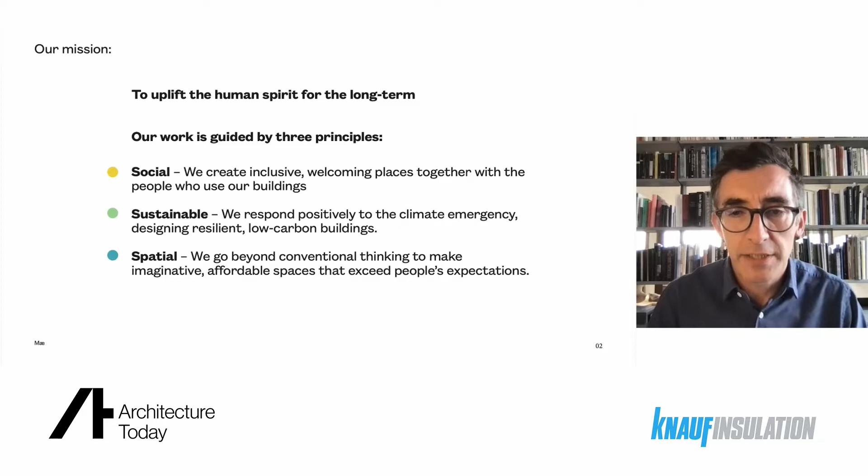Our priority increasingly is to respond positively to the climate emergency by designing resilient and low carbon buildings, and that's both embodied and operational carbon. And then we try and go beyond convention, particularly spatially. So for us, in answering the question about creating homes where people want to live, it's very much about creating spatial delight and places that are enjoyable and welcoming.

But I want to talk specifically today about the climate challenge and the fact that we need to ensure that all new buildings are operating at net zero by the year 2030. And so I want to start with our reflections on how we can do that simply in housing. A lot of you will probably be familiar with passive house design, but for us on Agar Grove, it was relatively new. And it's relatively simple, but the execution is hard. So passive house relies on some simple moves.

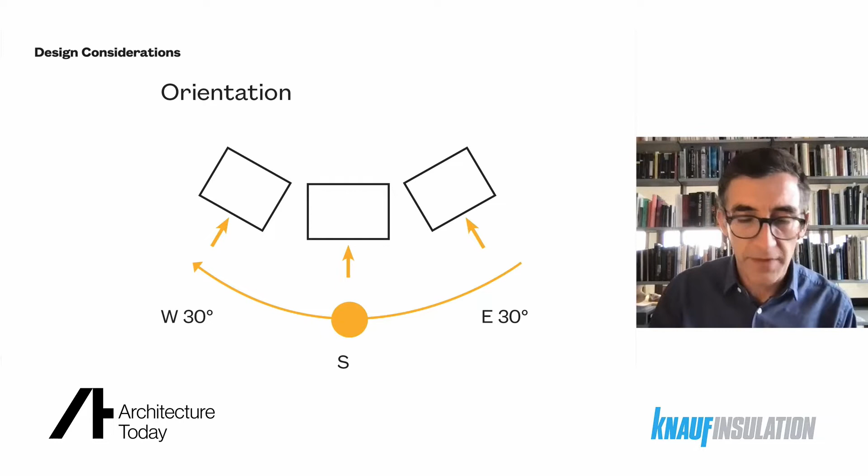The first one is about orientating the buildings so that they warm up naturally from the sun. So your ideal orientation is towards the south, which I'll come on to, is quite hard to achieve in urban settings. And I think one of the challenges today, if we're going to build sustainably, we want to be building in urban conditions, in cities, intensifying cities, where you want to build at a suitable density, and arguably simple south-facing orientation doesn't necessarily lend itself to good urban design. So we'll talk about some of that, the challenges of dealing with that.

The second aspect of designing to passive house is ensuring that there's good solar gain into the home, so it naturally warms up, but importantly has suitable shading and suitable sized windows so that they don't overheat, but also that windows are appropriately proportioned so that you're not reliant on artificial light during the day. And we've again learnt through the Agar Grove project what's working and what's not, and certainly lessons for the future.

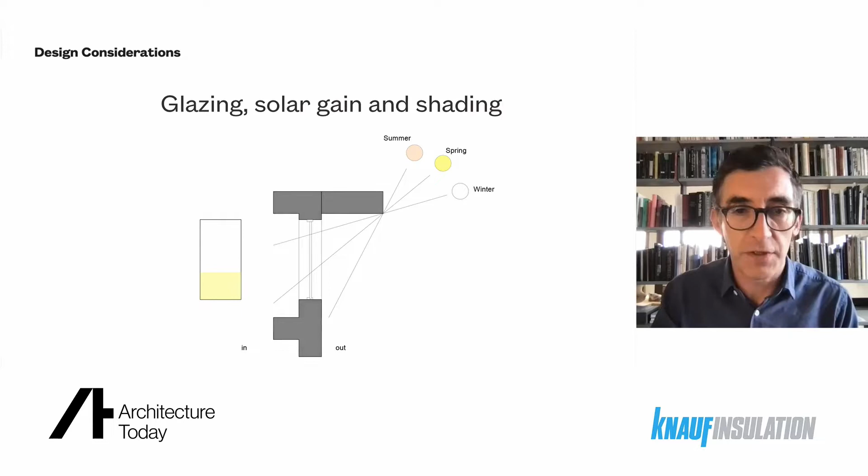Simple and effective form factor helps reduce the heat loss, and more complex building envelopes tend to be less efficient in terms of their form factor and therefore increase heat loss. So how do you create beautiful but relatively simple forms without dumbing down to simple boxes?

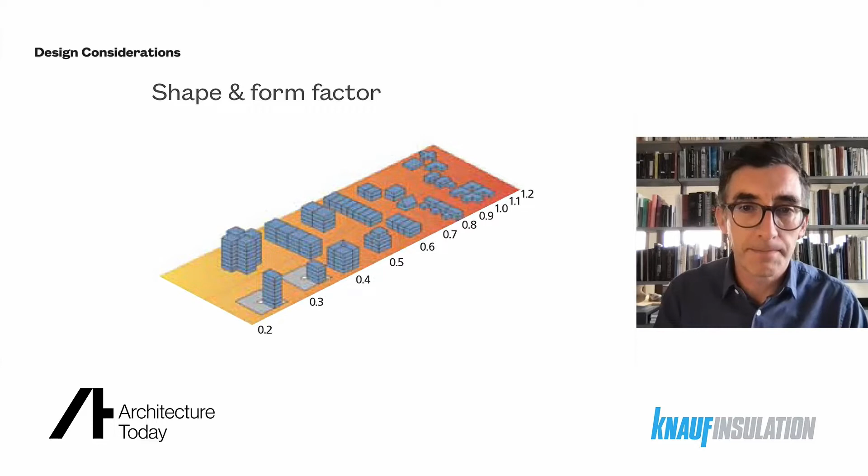And then the core element of passive house is about airtightness and really ensuring that you're not leaking heat through drafts and poor construction. And that overwhelmingly is often where buildings perform badly, the permeable construction or their leaky construction. So even things down to how you design in letterboxes, or rather don't, and manage that so that there's not leaking through letterboxes or cat flaps.

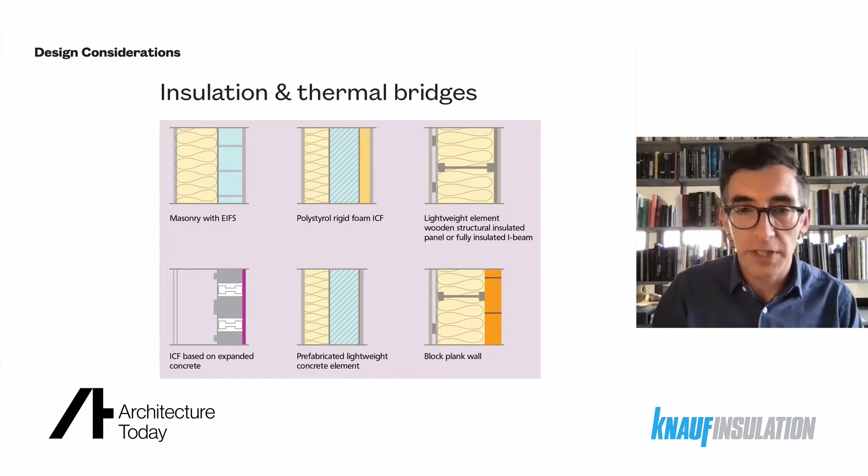But it's about ensuring that buildings are well built, so really keeping a close eye on form of construction and ensuring that there's a very high level of insulation, so super insulation as a way of minimizing heat loss and improving the warmth of the home.

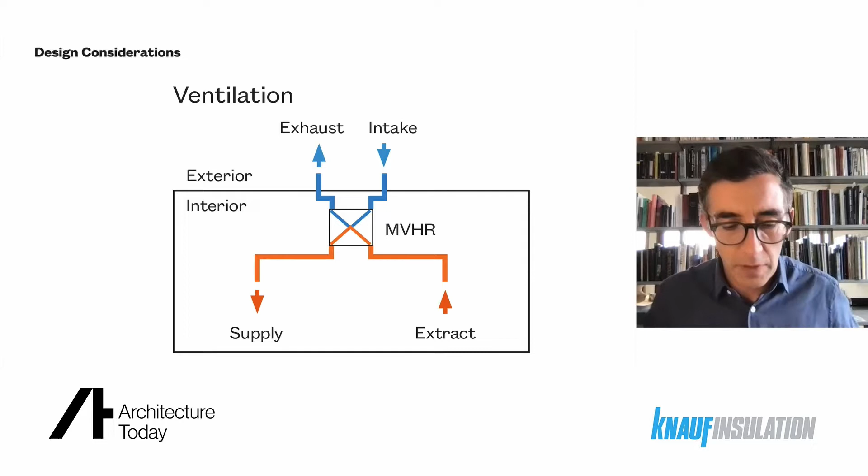And then the complementary element of passive house design is to ensure that there's sufficient air for health and well-being. And we do this through mechanical ventilation and heat recovery. So the moisture from your damp air from kitchens and bathrooms is extracted and emitted, but the actual warmth from the heat can be put back into the home, so it's not wasted, and ensuring that there's sufficient ventilation. And it's important to note that whilst airtightness is important, passive house isn't about hermetically sealed homes. You can open windows for natural ventilation, but ideally in winter you don't need to.

Now, the RIBA have set out very clearly a challenge for us all as architects and those in the built environment to reduce operational and embodied carbon. And through the passive house, I'm really just focusing on the operational element. For a typical home today built to standard building regulations, the operational energy needed is about 120 kilowatt hours per meter squared. And the RIBA's 2030 target, in order to meet our carbon reduction targets, is 35 kilowatt hours per meter squared. And passive house, for example, at Agar Grove, what we've achieved there is 15 kilowatt hours per meter squared. So way beyond the 2030 climate challenge target.

And I think it's perhaps, given my time, for others in another session to talk specifically about embodied carbon, which I haven't got time to go into, but I'm going to focus on the passive house element of operational energy in Agar Grove.

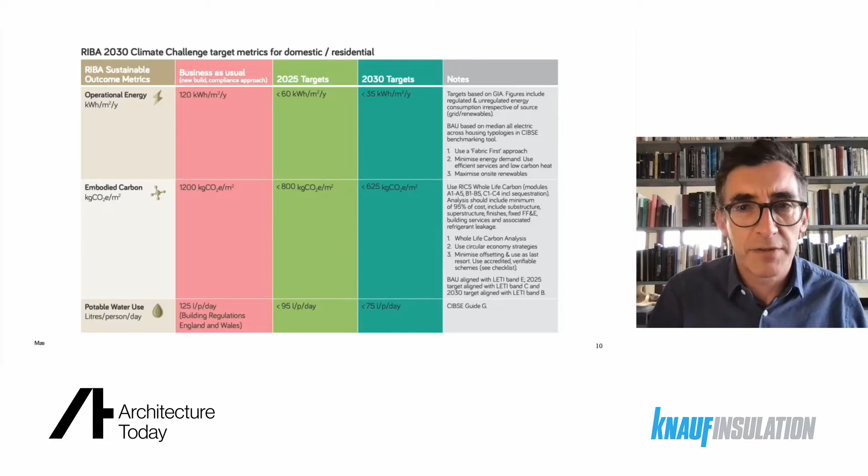So Agar Grove was a collaborative scheme developed with Hawkins Brown Architects as co-master planners, along with Grant Associates, and then with Arcadis as project managers and QSs, Stantec, Max Fordham's bringing real specialist expertise in terms of services and sustainability. And then we worked with Warm as Passive House certifier, and also Hill, the contractor, brought in Archetype for their specialist passive house knowledge as delivery architects.

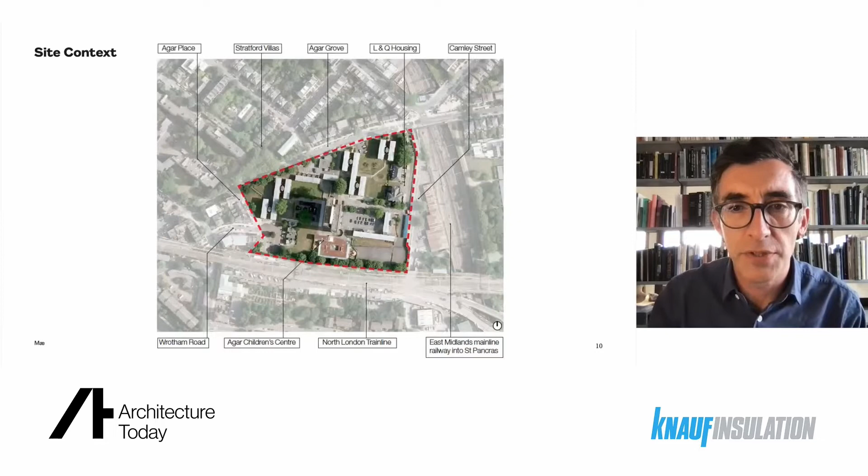And it's a classic 1960s estate, and you can see the grain of these buildings here doesn't respond in any way to the urban context. There's the Victorian and Georgian context to the north, which is much more about streets and squares, and the classic 60s estate turned its back on that character, and the buildings were substandard. They were low quality construction. They were undersized in terms of meeting decent space standards, and it was deemed through an engagement process that residents sought new homes rather than refurbishment.

And you can see from David Grandorge's beautiful photos here what the estate looked like. The low-rise buildings had no relationship to the outdoor spaces, so no active frontages onto the street. And again, the tower meets the ground very poorly in terms of its urban design. However, we are looking to retain the tower, so that will be stripped back to its frame, keeping the embodied carbon that's already in that building, and it'll be extended and reclad as new housing.

And early days, we looked to kind of balance that consideration of part retention and refurbishment and part demolition. But you see from the context to the north on Agar Grove that you've got wonderful Victorian villas, and on the left the estate very much turns its back to the street and has no sort of connection

to the urban realm. So our master plan, this is where it's a sort of challenge meeting Passive House, because you can see it's not just orientated east-west in order to optimize solar gain. We've got streets running north and south, and the master plan was very much about extending the green spaces on Agar Grove, so improving the public realm.

It was about stitching in and connecting the streets into their context, retaining Lulworth Tower and giving that new meaning by situating it within the new master plan, creating a safe family neighbourhood of streets with continuous frontages, so active frontages and front doors onto the street, and then importantly creating better homes for the residents who are being rehoused. So nobody was displaced off-site, everyone was offered a new home on the estate to better space and environmental standards.

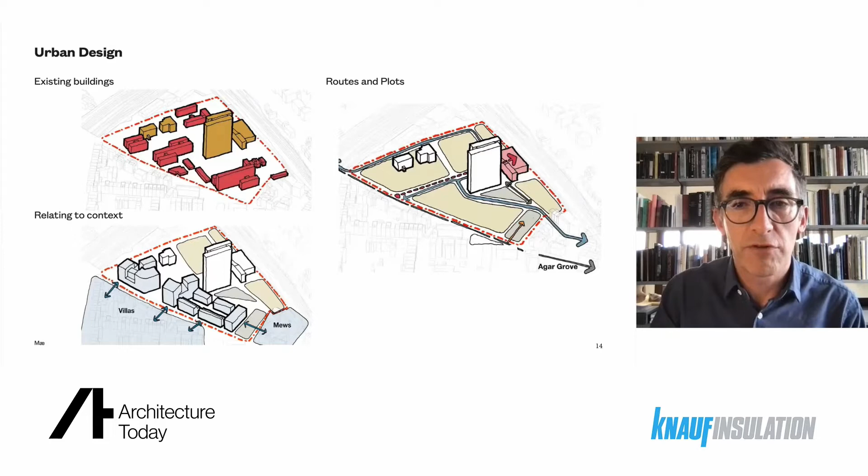And then the scale increases towards the south. So on the north, we've got villas that face onto the existing villas opposite, and then building up height towards the railway where we can deal with the density. So here you get a better overview of the mix of typologies that we're offering. So we've got terraces, villas, and mansion blocks, and then a new tower block at the back that rehouses the residents who are currently in Lulworth Tower. And then Lulworth is the last phase, and that can be refurbished and offered up as market sale once all the existing tenants have been rehoused.

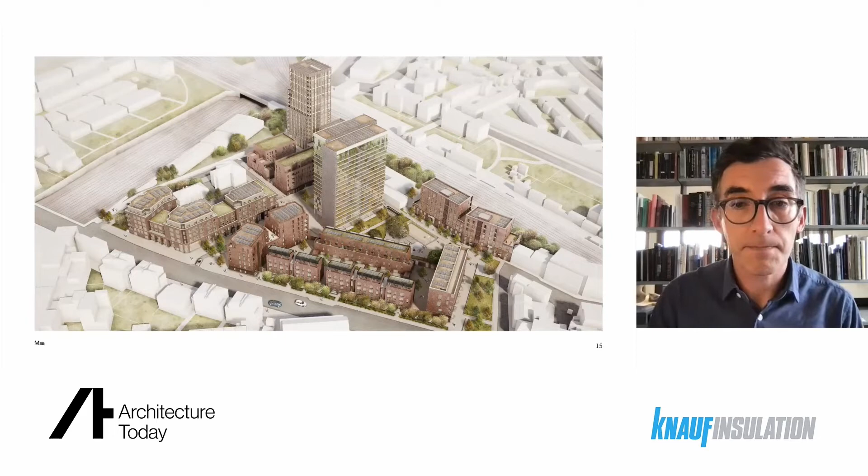And so really what we're trying to do here, and very much responding to the brief for today, is about creating places rather than just housing, is through the variety and the mix of housing on this estate, create a rich mix and a rich place of diversity in terms of diversity of building type, diversity of housing type, and diversity of tenure.

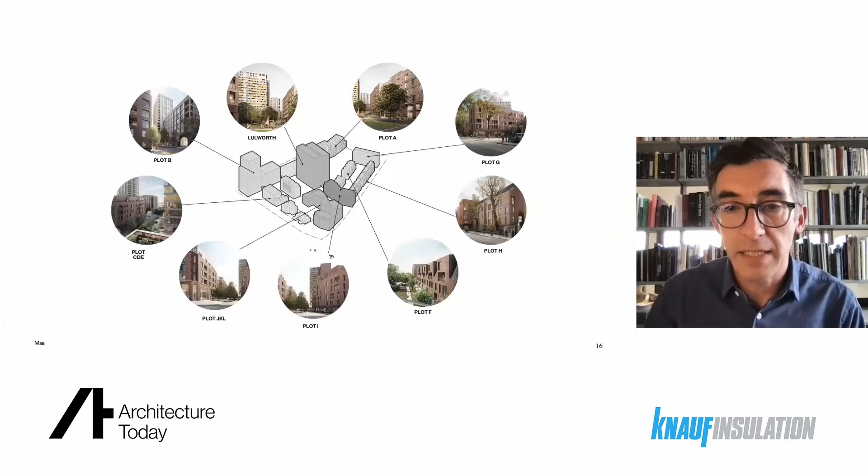So the actual buildings are 50% designed by Hawkins Brown, 50% by May, but dotted throughout the scheme, so we get that variety. But we coordinated with our friends at Hawkins Brown a material palette from the outset, which is a mineral-based material palette of bricks, which are very much part of the urban context, albeit with a variety of colours and textures.

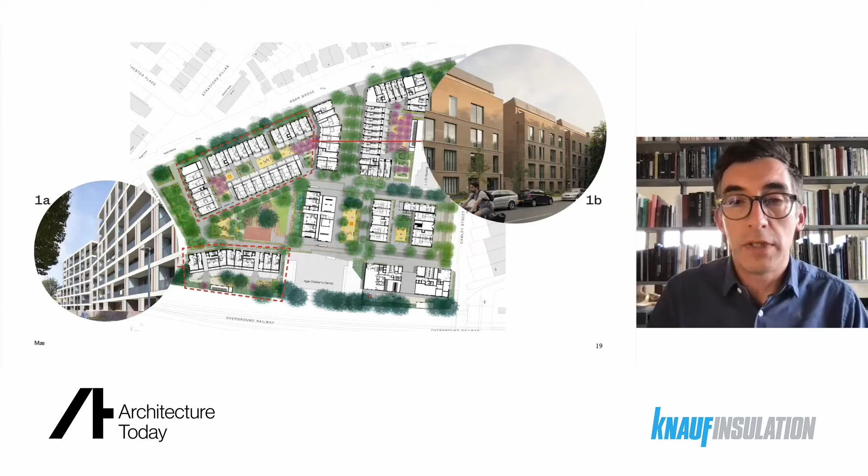So to date, we've completed phase 1, which are the areas dotted in red. Phase 1A was designed by Hawkins Brown, and that was on the one available site. So that was on a car park, and we were able to build that in order to then move the first group of residents into it and do the first phase of demolition. And then that started the cycle of rehousing and redevelopment. So this is Hawkins Brown's building, which comprises 38 social rented homes. And you can see Lulworth Tower in the background.

And just dealing with the Passive House moves, you can see that on the right-hand image, it's very generously glazed with large balconies that help provide overshading of the homes, preventing overheating rather. And then on the north, a less heavily fenestrated elevation with more insulation and more mass to reduce the heat loss. So we've designed to ensure that homes are optimized for dual aspects, so there's good cross ventilation.

And here you can see from this plan from phase 1B, which is our buildings at May, that the buildings are through flats or through maisonettes. So this phase 1B comprises 23 market sale homes on the end here, this building here, which you see on the left, and then additional social rent, which I'll show in the next image, in the 2 terraces off it. And they all share a communal garden on the inside. So all residents have access, regardless of tenure, to that communal garden.

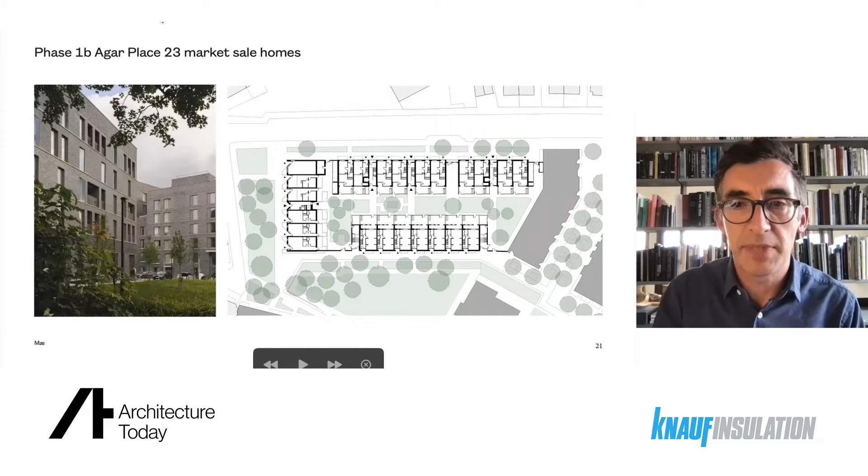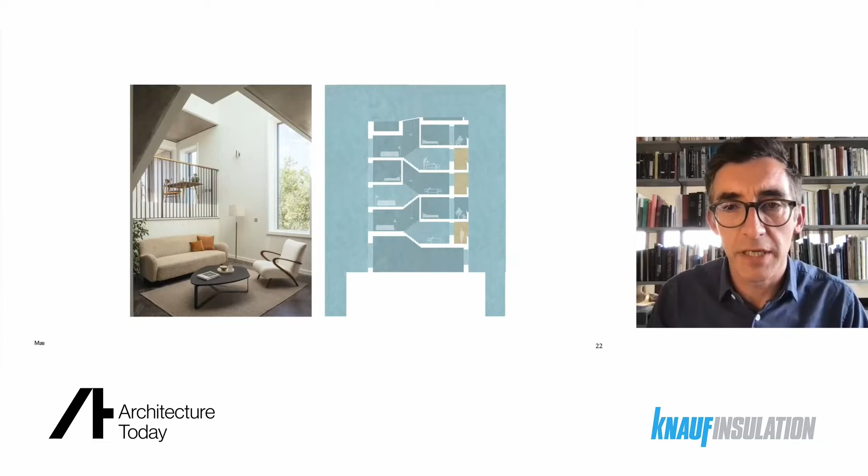And you can see that at ground, there are duplexes with through rooms and dual aspect, and then a mixture of maisonettes and duplexes above. And with these market sale homes, we've designed them as split level. So building on the history of Camden social housing and public housing under the Sydney Cook era, he pioneered with architects like Benson Forsyth, Neave Brown, some very interesting typologies that we were keen to explore further for today. So these split level homes have real spatial delight and real qualities in terms of light and air. But you can see from this diagram that they're quite challenging to achieve passive house.

So this just talks you through how we applied those principles that I showed you earlier. So thermal airtightness, triple glazing for the windows, biodiversity on the roofs and photovoltaics for renewable energy, shading from the balconies, and then MVHR for the ventilation and heat recovery.

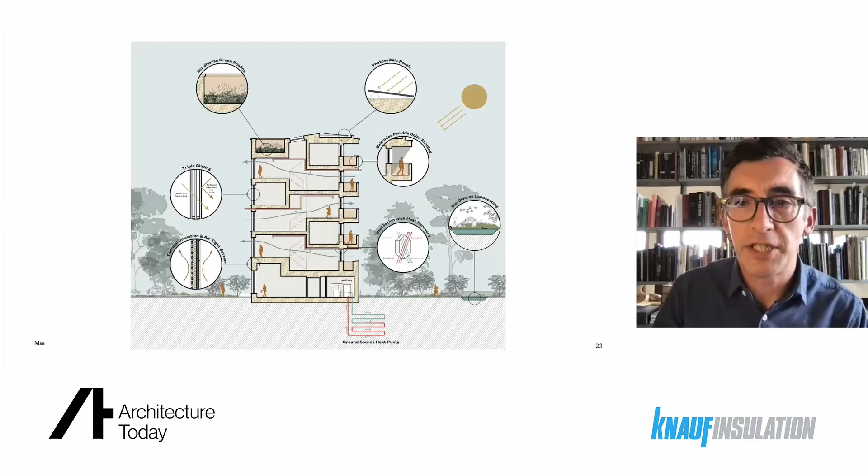And then the additional building behind that is Hazelbury Way. So this is delivering 14 social rented homes. And what you're looking at here is double stacked maisonettes. So you've got a tier of maisonettes which have their front door onto the street or the play area that you're looking at, ground and first. And then the upper storey of maisonettes are accessed off a gallery at the back. So at the left-hand end, you've got the entrance to those, and you go up a stair to a gallery at the back, and then you've got a duplex above, expressed in these very large, almost dormer-like forms.

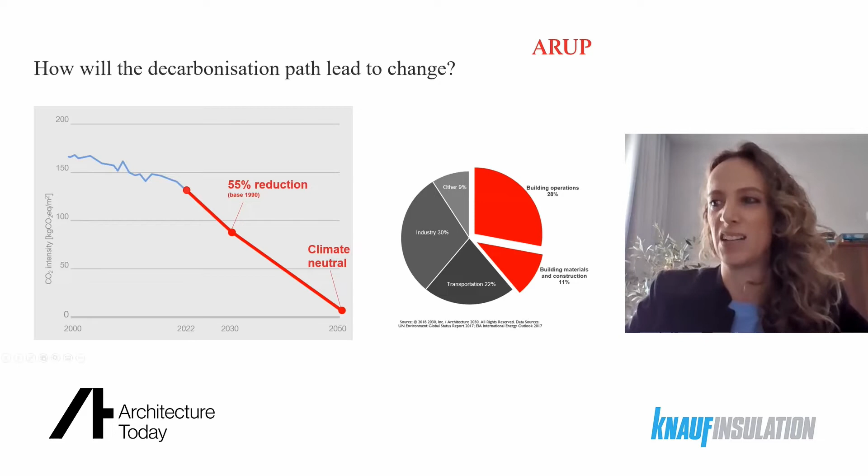So I will be talking about buildings for the future, and especially how decarbonization is going to influence the future of buildings. So how will the decarbonization path that is projected by the Paris Agreement influence our built environment? The built environment is influencing this decarbonization path majorly. About 40% of the carbon is from the built environment, and it consists of two parts: energy and materials. So I will be talking about how these two parts influence the built environment and how it's going to change. And actually, this change is not as logical as it sounds, because if you look at the past 30 years, the construction sector isn't really known for being rapid in changing.

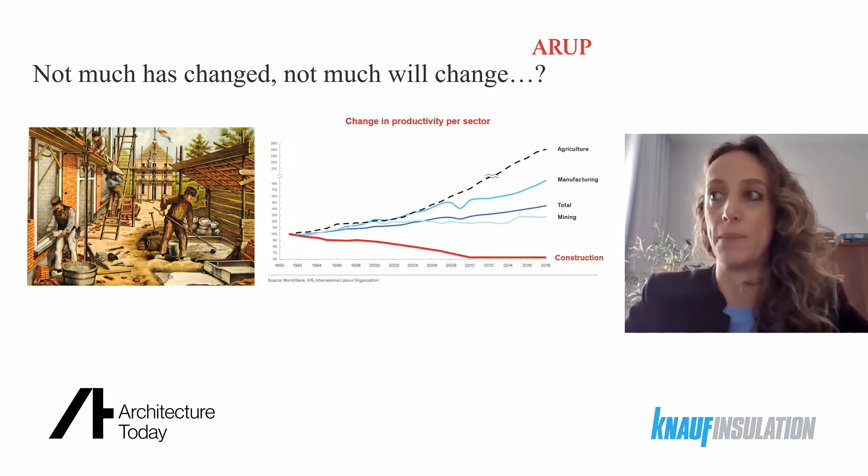So, for example, if we look at the productivity in the last 30 years, then not much has changed for the construction sector, and it only changed for the worse, actually. So if not much has changed in the last 30 years, what will change then in the next 30 years? And is sustainability powerful enough to change that? So to understand that, it's interesting to look at a different sort of asset which has been impacted by sustainability in the last couple of years, and that is the oil and gas firms. In 2016, a record number of oil and gas firms went bust, and that was due to the renewable energy revolution.

So what we've seen from then is that really there was a big change in the public opinion against oil and gas firms. And what we also saw is that reputational damage was going to lead to investment funds shifting their investments away from oil and gas. So there was a really big financial influence on this sector. So basically what we see here is that this asset got stranded, is what they call it.

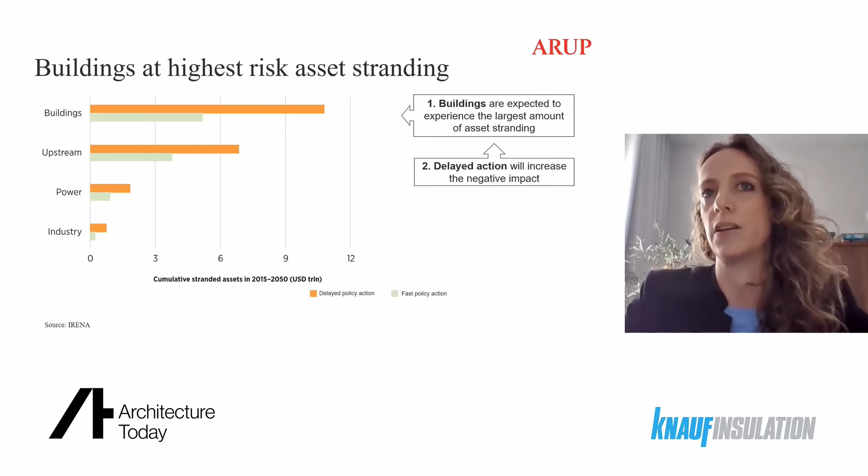And there hasn't been a lot of research about other industries of assets that got stranded until recent years. So what we see from this research is actually that the built environment is at a higher risk of getting stranded. So it's a higher risk than upstream oil and gas. And what we also see from this research is that delayed action will actually increase the negative impact. So the sooner we start with this transition, the better it will also turn out financially.

So what is interesting is to look at this big decarbonization path and how this influences portfolios and individual assets. So for example, in this CRISP analysis, we looked into a portfolio of a number of buildings and looked into when they got stranded over time, and also what the gap would be between the portfolio and the decarbonization targets.

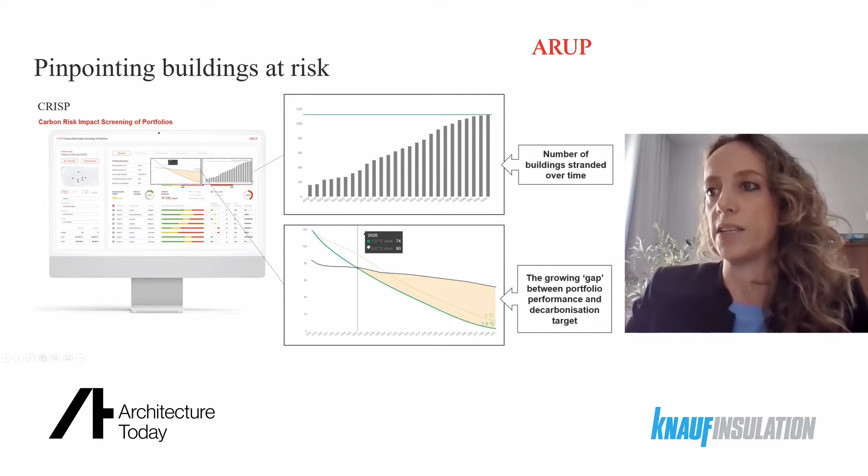So what is interesting about looking at it from individual assets is that we really can see what is happening and can start to translate this abstract decarbonization into real KPIs that are understandable for real assets, so that we really know what to do for individual buildings and also know where to start and how to prioritize these.

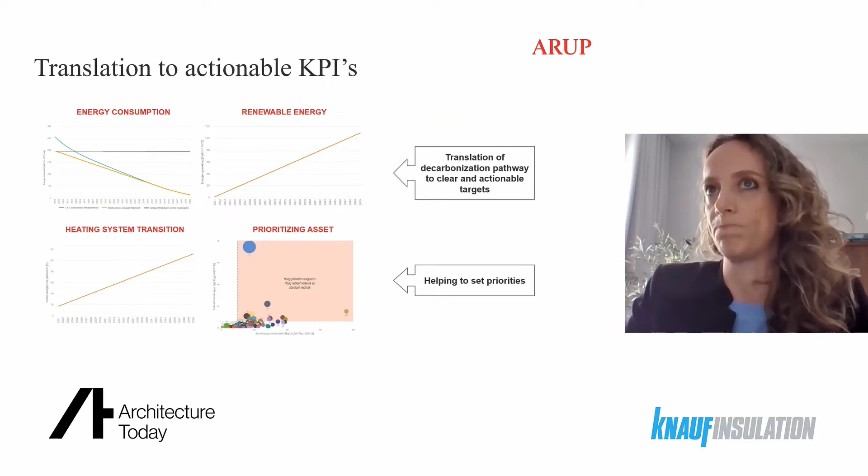So this impact on the financial aspects of the built environment is also already starting to happen, and that is related to, for example, energy labels. So what we see at the moment is that financial institutions see the energy labels for buildings, especially the buildings with a low energy label, as a big risk for financial investments.

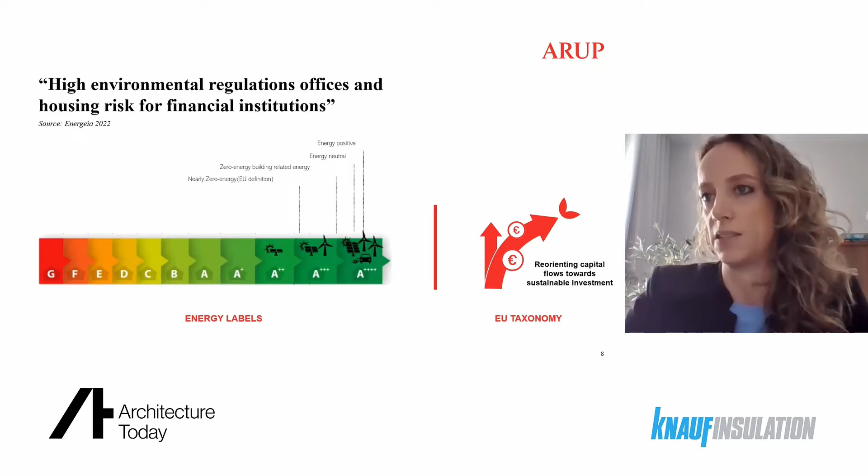And this is expected to grow when the EU taxonomy takes place in the next couple of years and starts to establish. The EU taxonomy is a law that is trying to reorient capital flows towards sustainable investments. So what this in short means is that it will become more attractive to invest in sustainable real estate than in unsustainable real estate.

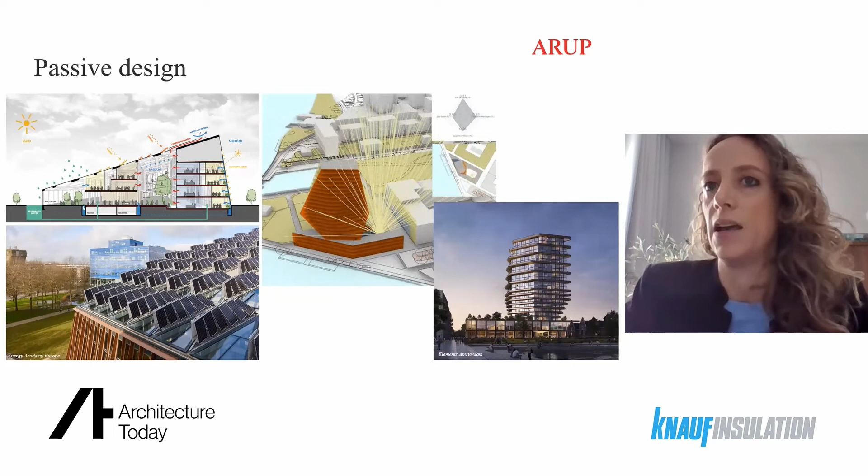So what is important is that we already start designing buildings so that they use less energy, so that we take natural elements as an input for our design and really start to shape our buildings around them consuming less energy. And that counts for the building shape, but also for the building envelope. Again, these can really take the natural elements to, from the first instance, already start to reduce a lot of energy.

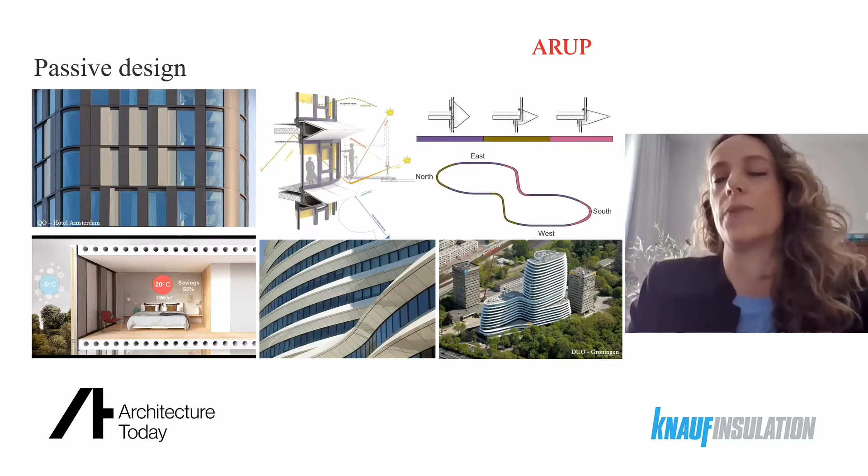So a second thing that is really important is that we also start to collect data from our buildings and really start comparing that to an optimal performance of a building, so that we can really pinpoint underperformance. And a way to do that is by building a digital twin, which is really a mathematical model of the building, mimicking temperature flows and energy flows in a building, and which can really indicate where changes start to happen. And this is the leverage point for really using machine learning in buildings and getting to a big step in smart buildings.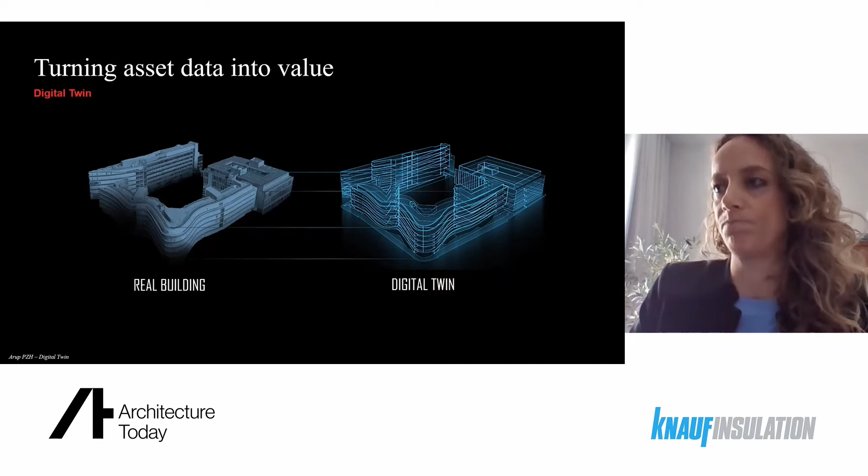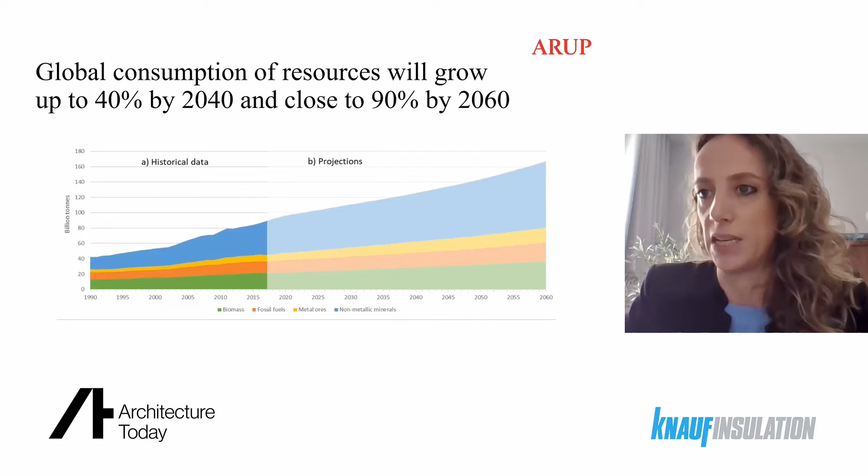So putting this into relationship to this asset stranding, what I just talked about, it's really interesting to see what that would mean for asset stranding if we really have such a major step to go in the next 30 years. And also when you put this in a relationship to our global consumption of resources, which will need to grow by 90% by 2060 compared to 2017 values. And this in a context in which Europe is really dependent on other countries.

For our critical raw materials, we are pretty much dependent on Russia and China, especially in the political climate that we're now in. It really pinpoints that we need to take care of these critical raw materials. And also in relation to the energy transition, these materials are mostly needed for technologies that are required for this energy transition. So it's really important that we rethink how we use materials.

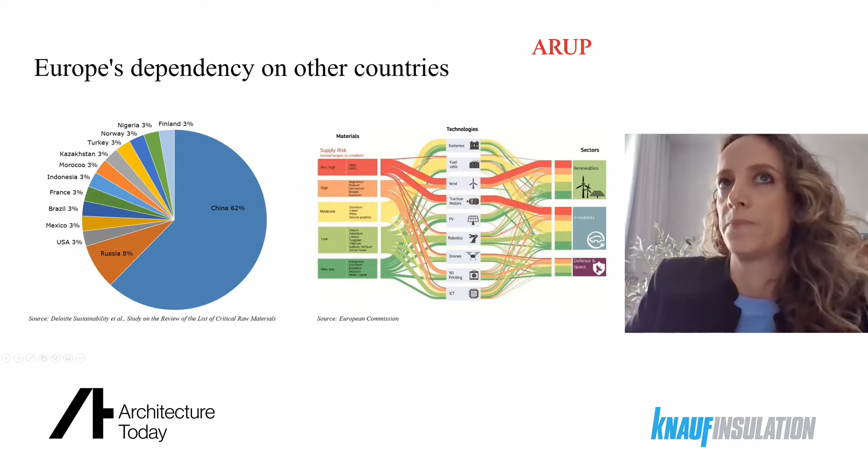And there's another difference between the energy transition and the material transition, and that is the fact that to meet our targets for 100% circular in 2050, we need to start making different decisions today, because the buildings of our future are moving away from traditional mines to urban mines. That means that the buildings of today are the mines of the future. The building materials that are in them and the way that they are demountable and reusable is going to determine if we can make the targets in future.

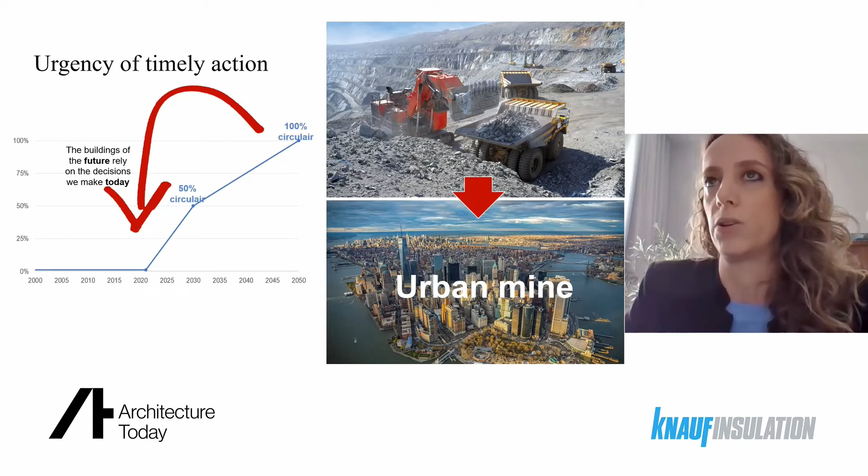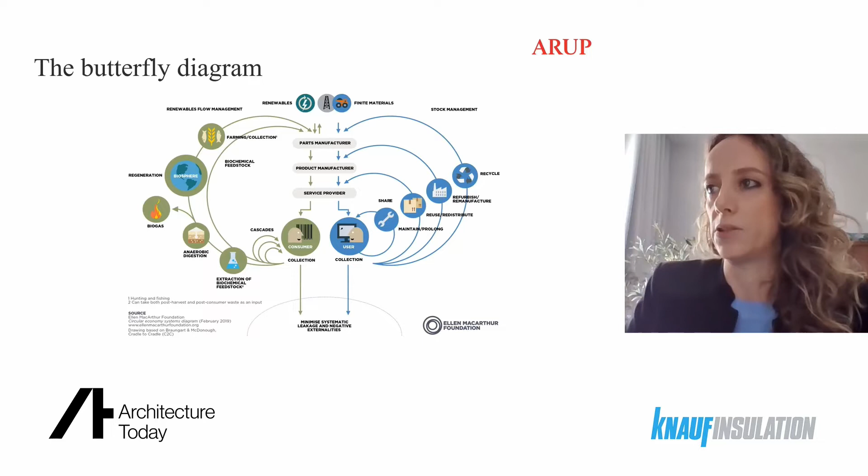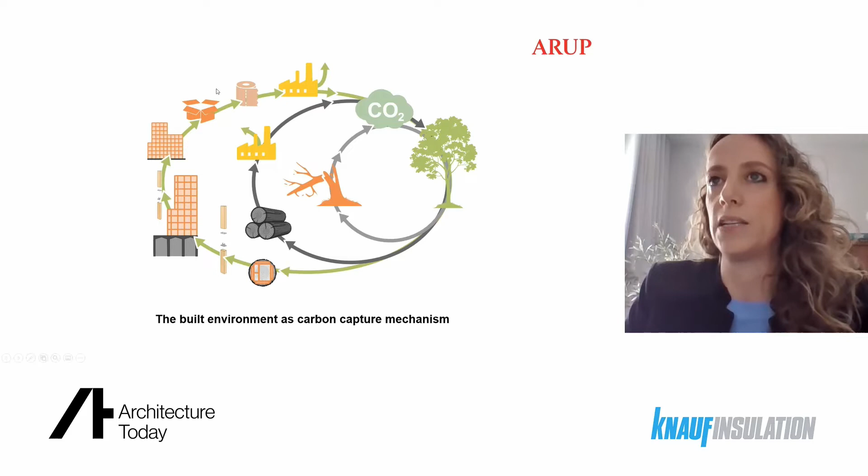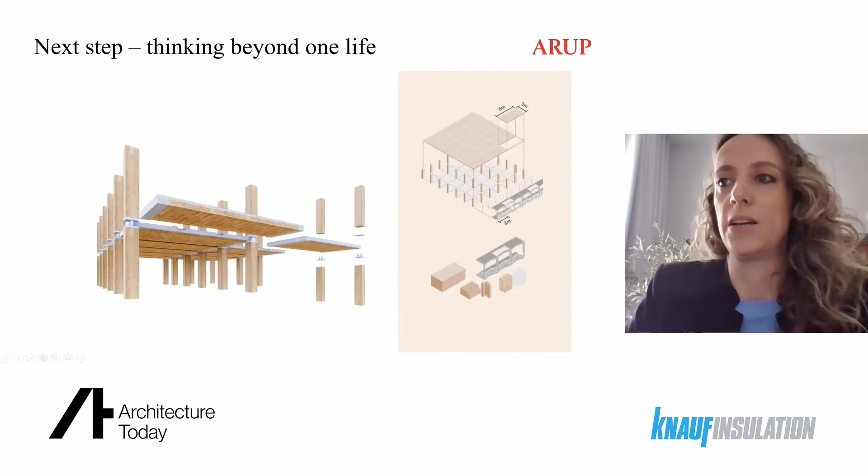So what we're trying to do is elongate the natural cycle into longer cycles, and the idea is that at some point we are also able to reuse timber so that we elongate this path as long as possible. This also means something for the way we design our timber buildings now, so that we design them to be reused in different cycles in future.

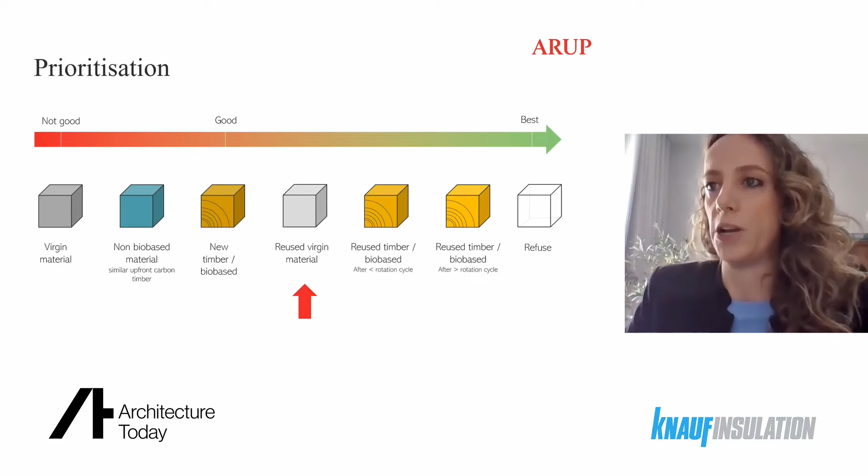So that brings us to the other side of the spectrum. Not for all materials is it possible to use bio-based materials. For some we will be depending on virgin materials. An example of that is glass. At the moment there's a lot of glass being recycled, but actually about 80% is being downcycled, losing its value, or being landfilled. So for this Lloyd's building in London, instead of replacing the glass with better insulated glass, we took the glass out, upgraded it and put it back into the building so that it has much less of an environmental impact.

What we need to do is also digitize our processes in reusing, because if we build buildings now, we need to build them from the materials that are already existing out there. So we can't design everything. We need to understand what is out there and how we can put this together so that it shapes a new building. So we need different design aspects, and also, for example, parametric approaches to support this design approach. An example of a building that really took circularity to a next level is the People's Pavilion.

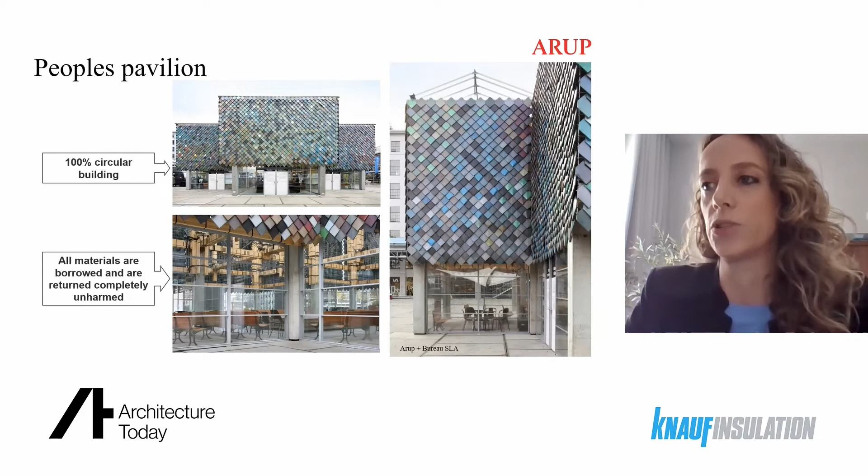This is a temporary building which is 100% circular building, and all materials are borrowed and are returned completely unharmed. So what this type of building really teaches us is that it's not only about replacing one material by a less environmental impact material, but actually it's also about changing to different types of buildings, so different types of concepts. So, for example, building with mortar or gluing things together, that should be something that is in future something from the past. And also mixing aesthetical functions with technical functions, that is also something that we really need to reconsider.

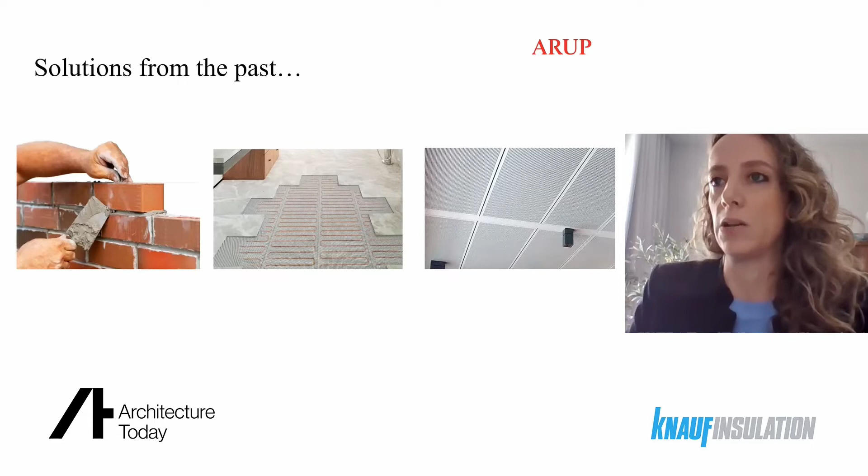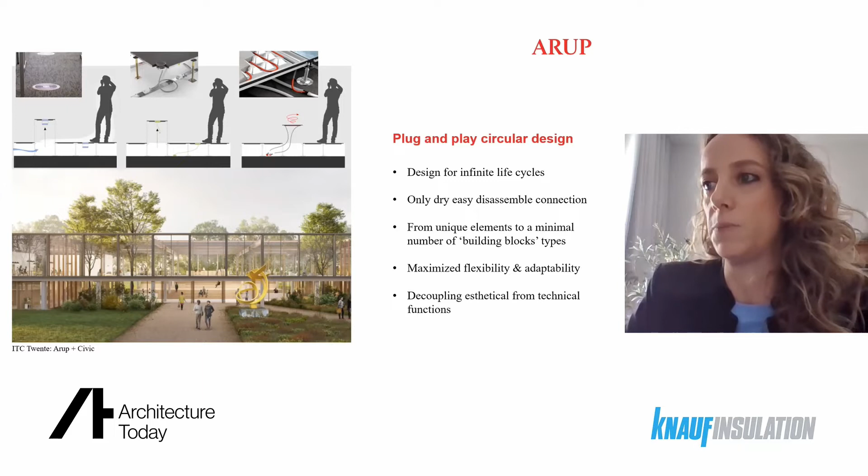So this means that we need to change also the way we build them, the way we put things together. So, for example, we need to move towards a plug and play and circular design. And so we design not only for this life, but for infinite life cycles. And we try to use only dry and easy disassemblable connections. And we move away from using unique elements, but build with a limited amount of building blocks that we can just reuse in another building. And also try to maximize flexibility and adaptability of these buildings and building blocks and decouple aesthetics from technical functions.

And another thing that is going to be really important, like with energy, is that we need to be starting to set goals, even if the EU didn't set really clear goals yet. Like I said in the beginning, with stranded assets, the sooner you start, the easier and the less impactful financially it's going to be on real estate. So setting goals will really initiate change, and starting early is really important. So hopefully in the next couple of years, the building construction industry will be known for being an industry in which change really happens fast.

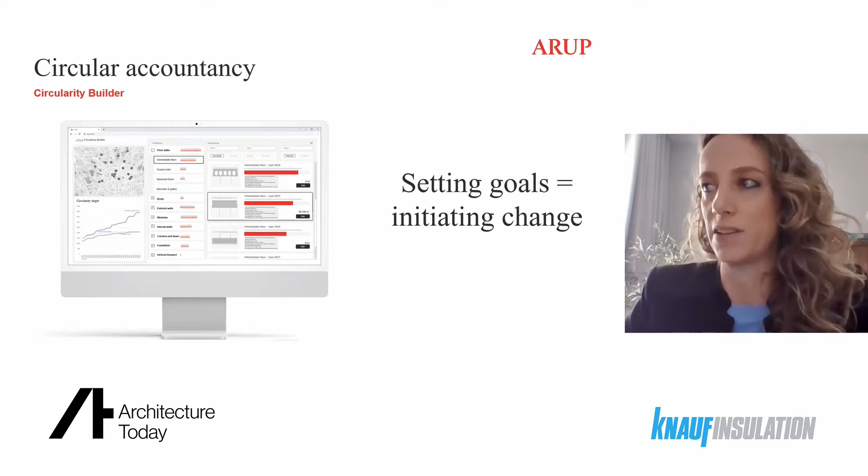Thanks, Krista. So can I just pick up on this issue of reusing building materials? How are you finding insurers react to this? Are they on board? Are you still getting resistance? And on a related issue, I wonder if you're able to give us an update on what's currently being done in the industry with relation to material tracking.

So to answer your first question on insurers, how they respond to it, it really depends on the material. So for some materials, they don't really care, like if it is floor finishes, for example. But there are other materials that require warranties or certification, and there it is really important. And I think that needs a change in the industry. So I think we need to look differently at reused materials. It has now the image of being secondhand and having less quality. And I think we need to move to thinking of reused materials as just a different mine. So instead of having steel from the mine, you have reused steel coming from reused products, and you get the same warranty. So we see that already happening, that there is a remanufacturing process in which you get the same warranties for the materials.

So on the material tracking, what we see now is that we're developing material passports. So based on the 3D models, the BIM models of the buildings that we design, we created a material passport that is delivered with the design. And that's still in a premature phase. So I think what we really need to tackle is using these material passports also for the operation phase, so that we keep them live, and so that not with every refurbishment the material passport intent gets lost. And it also needs to be updated to include more relevant information. So really the ingredients of materials, so that we understand what's in it to have the best recycle processes, and also to understand how it can be dismantled and reused in the future. So we need to add that information.

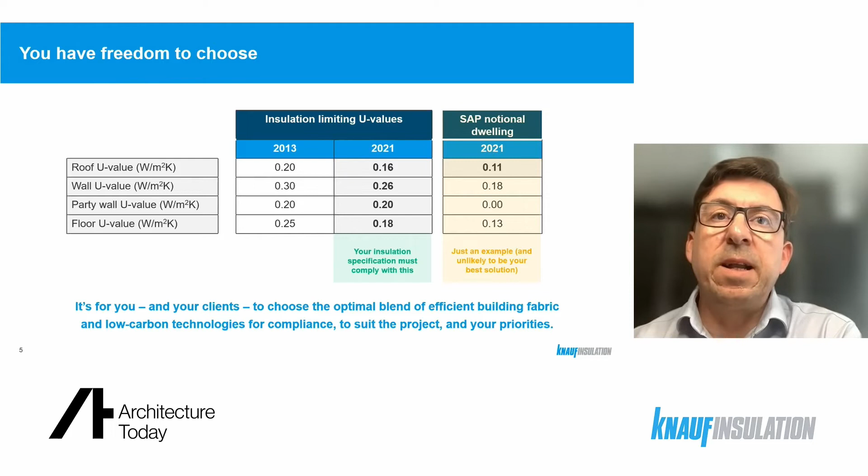For example, it's possible to find a route to Part L compliance that retains existing building footprints with a non-combustible material. Or, on the other hand, to choose an approach that prioritises an ultra-efficient fabric to minimise the need for low carbon technologies. It's all about getting the whole house recipe right, which will depend entirely on the needs of your client. So these needs are diverging as the regulatory picture gets more complex. Let's look at some examples.

A volume house builder, for example, will need recipes fully optimised for cost. Their size means they can probably procure low carbon technologies at scale, at a competitive price, and with guarantees of availability. They'll wish to apply a consistent specification to all houses across a development, and on larger developments, this will require a recipe that involves minimal changes or redrawing of plans as transitional arrangements end.

If you're working for an SME house builder, they may prioritise simplicity, favouring a more efficient fabric over complex renewables and heat pumps. This could be because they want to stick with what they know, including products and suppliers. Or it might be they're concerned about the availability, usability or longevity of newer low carbon tech.

High-rise developments may be much more influenced by the choice of heating system. Limitations on space for renewable technologies such as solar panels mean they're more likely to require an ultra-efficient fabric.

And of course there are other regulations to consider, like those related to fire safety. On a bespoke self-build project, the clue is in the name. There will be a very specific set of priorities completely dependent on the client. Some generalisations we might expect are that there may be greater scrutiny of quality and as-built performance.

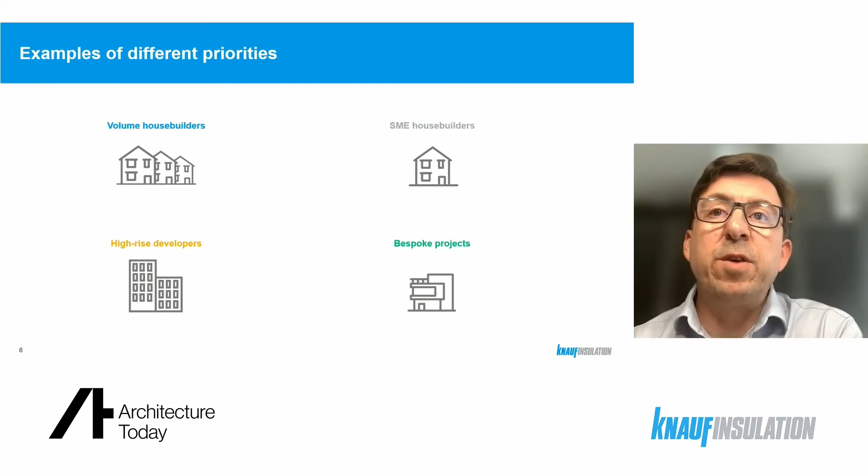Whatever your client's needs, to get the specification right, it's critical to consider how the installation you choose performs in the real world. Not just on paper, in drawings or on calculations, but in each individual home as built. The three key considerations here are measured efficiency, genuine sustainability, and fail-safe fire safety.

Earlier, I explained how the new Part L is introducing greater scrutiny of as-built quality. This is just the start of a paradigm shift to a new model where the actual performance of every home is measured. The government has stated as much. Its EPC action plan says they will move to a true measure of in-use building performance. And the new Homes Ombudsman is being launched with fuel and energy performance within its remit, and the power to enforce redress and issue fines of up to £50,000 per home.

What this means is that architects must consider buildability in their specifications. How likely is it that the performance you've specified will actually be delivered on site? Does your specification rely on perfect walls or perfect installers? Will the average installer be able to fit the insulation you've chosen correctly?

The answer is to choose insulation materials that are more forgiving of conditions on site. To be blunt, ones that are difficult to get wrong. As a general rule, flexible insulation materials that work by trapping air are often more adaptable than rigid gas-filled foam boards.

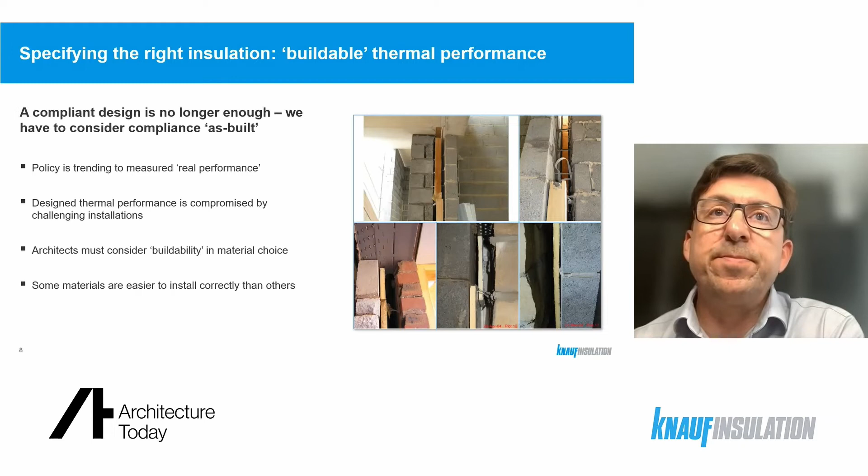Real-world performance reduces the operational carbon emissions from the building, but that's only part of the equation. Genuinely sustainable buildings consider whole life carbon, including embodied carbon. National regulation on embodied carbon doesn't exist yet, but it is inevitable. And the market's already changing. RIBA's 2030 Climate Challenge recommends an embodied carbon target for practices.

There are some elements of construction in this country where reducing the embodied carbon will be difficult, but insulation choice is one of the low-hanging fruits. The answer for architects is to specify products low in embodied carbon. You can get this by reviewing data from environmental product declarations.

The third essential real performance consideration is fire safety. We've all seen the devastating consequences when supposedly fire-safe systems fail, and the ongoing pain and stress for those living in buildings that now need remedial works. I don't think we should be designing homes where the fire safety assumes and requires a 100% perfect installation.

In high-rise homes, the answer is simple. Developers now only use non-combustible insulation. I think we should apply the same principle to all homes. Design using products that help limit the spread of fire when things go wrong. Using non-combustible materials is the safest choice.

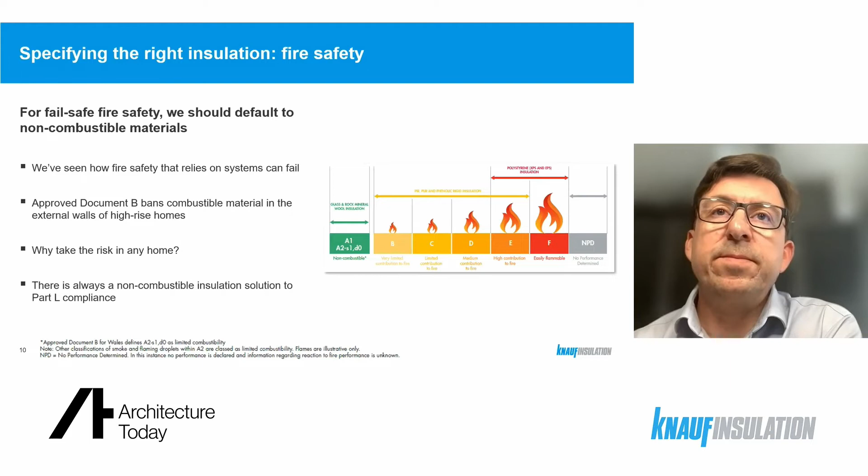As you can see, although the new Part L is about improving the thermal performance of homes, when it comes to specifying insulation, that's only part of the story. To get the best possible compliance approach and insulation specification for your clients, you need to think beyond U values. Yes, you should consider cost efficiency, availability, simplicity, and future-proofing, but also embodied carbon and fire safety, and all in terms of how the building will actually perform in the real world.

Consider all of these and you'll find the right route to Part L compliance and ultimately better buildings designed with people and the planet in mind.

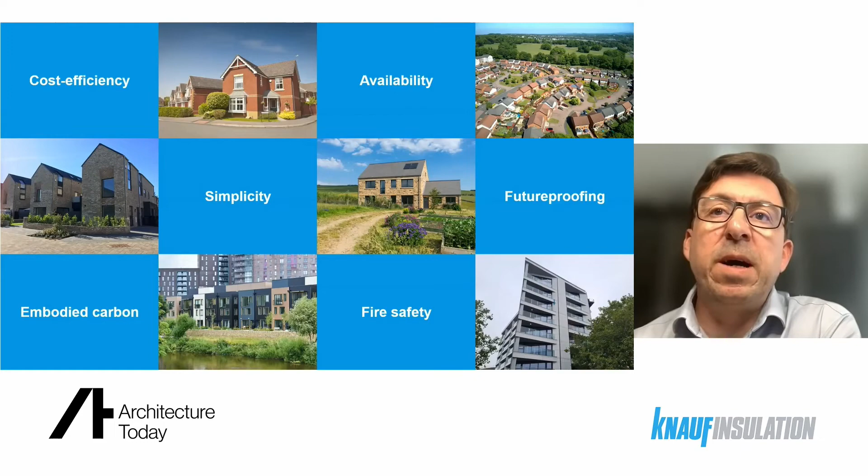Thanks, Matthew. So you've explained how the new Part L is going to place a greater emphasis on the way buildings perform in the real world. To state the obvious, that's very much dependent on the quality of workmanship on site. So do you think this is going to lead to a move away from design and build contracts and a return to traditional contracts where the architect has more of a role to play in terms of monitoring the standard of construction work? Well, that would be nice, wouldn't it?

I think it could. I think the question really is, how can the client prove that the dwelling has been built the way it's been designed? So I mentioned photographic evidence in the presentation there. The photographic evidence that's going to be required is going to be an image of each thermal junction type and an image of the insulation type and the thickness.

And those photos are going to be checked by the SAP assessor at the point where the energy performance certificate is issued. But at that point, the work will be almost complete. So what if the photos show that the workmanship wasn't up to scratch? I think there's a risk inherent in the proposed process that the EPC can't be issued for that home, in which case, obviously, it can't be completed or sold or rented.

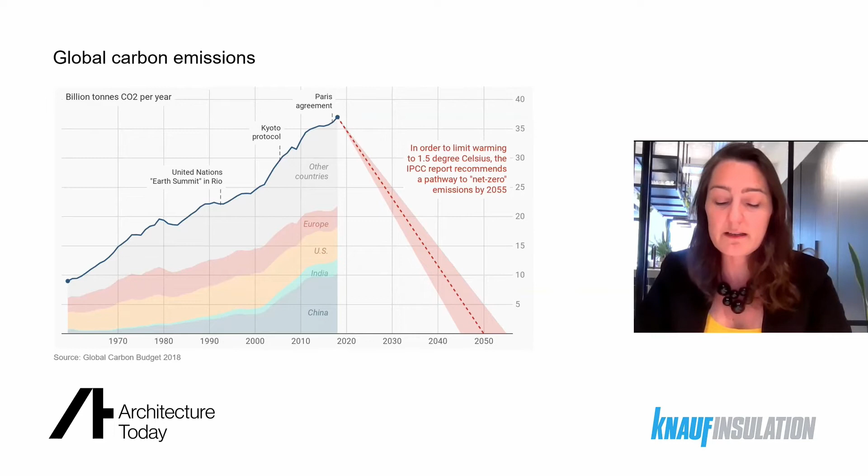So the good news is that we know how to do it, and I will help you understand how we can do it. First, we know obviously that the rise in temperature is very closely related to the rise in CO2 in our atmosphere, and this is the cumulative curve of CO2 present in the atmosphere, and it's an all-time high in the history of humanity. We've got to absolutely go on a very fast descent to achieve net zero by 2050. The good news is we know how to do it. We absolutely do, especially in the construction industry. So I will show you with a few examples.

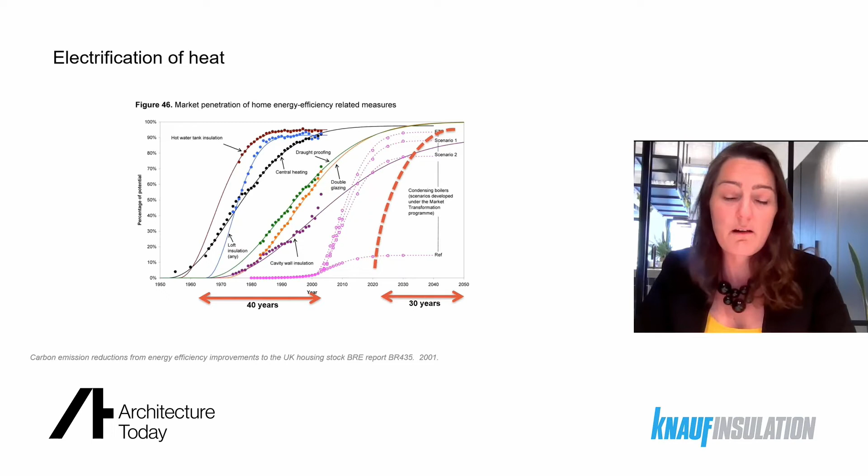We are also capable of great change in our nation, and this little graph shows that in 40 years we managed to dig up all the roads in the UK to install gas pipes and gas boilers and central heating to 95% of our residential properties. So we are capable of great change, and we have 30 years to implement this great change. We need to start now, but together we are absolutely able to achieve this. So how?

Well, first we need to observe that in the UK, 27% of the CO2 emissions come from the use of buildings, and in particular the biggest proportion is the use of residential properties at 80%. So we can focus on this particular type of buildings to have the greatest effect on curbing these CO2 emissions.

So these residential properties are split within certain tenures. So there is 18 million which are owner-occupier, 4.5 million private renters, and 4.5 social rented. So the owner-occupier group will definitely be a very important type of owners to help reduce their CO2 emissions.

The particularity that we have also in the UK is that 60% of all homes are older than 80 years, or older than the 1960s. So this is something that is very specific to the UK, and it's not the same across all European countries.

Also, additionally, 21% of the UK residential stock is Victorian, and we love our Victorian heritage. So we need to address this specifically to retain this historic asset, but it is particularly inefficient at retaining heat, and quite often still has single glazing. So we need to make sure that we address this particularly inefficient stock.

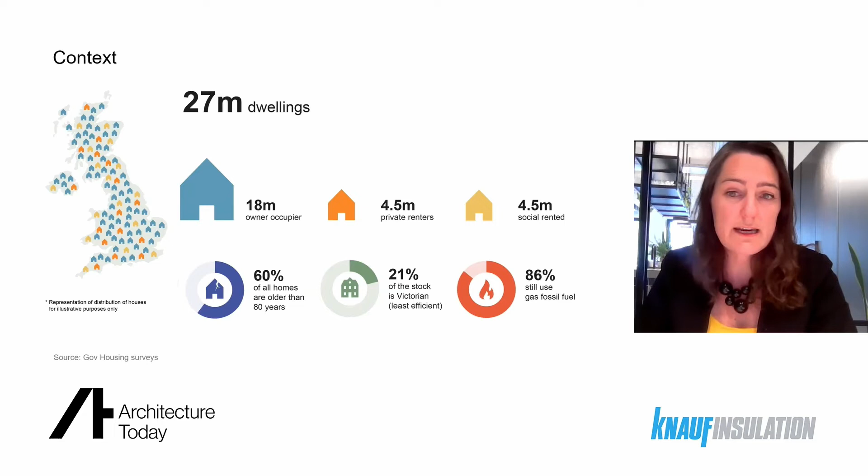And finally, 86% of all residential properties use gas boilers, which are obviously using a fossil fuel, and we need to reduce this 86% down to zero. But we know how to do this.

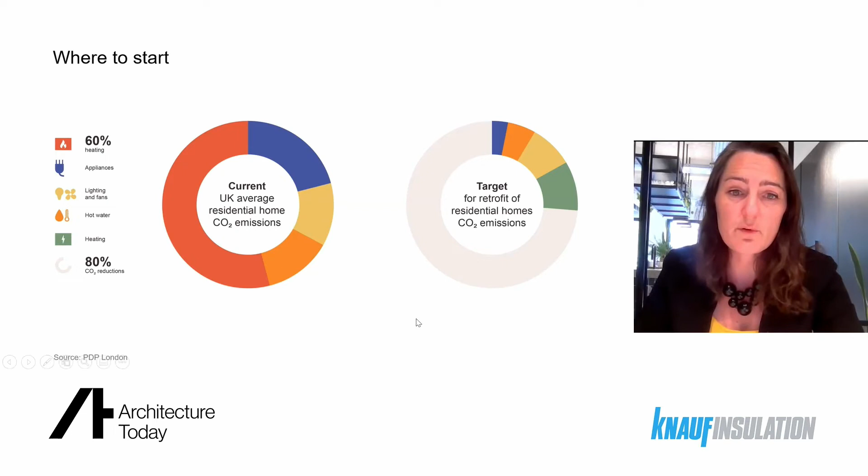So it is absolutely feasible, but you will see that the main effort that we need to make is really to reduce this space heating. The CO2 emission related to space heating is the most important focus to have when we're talking about retrofit.

So it might sound a little bit technical, but as you are all probably becoming more aware of kilowatt hours, maybe with an electric car, these are measurements that we need to also apply to our own houses and residential stock. So the kilowatt hour will be fundamental to understanding the targets that need to be achieved.

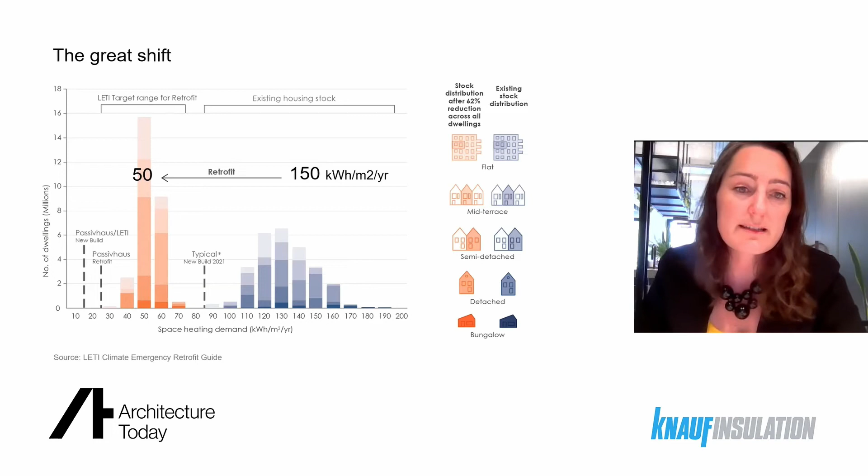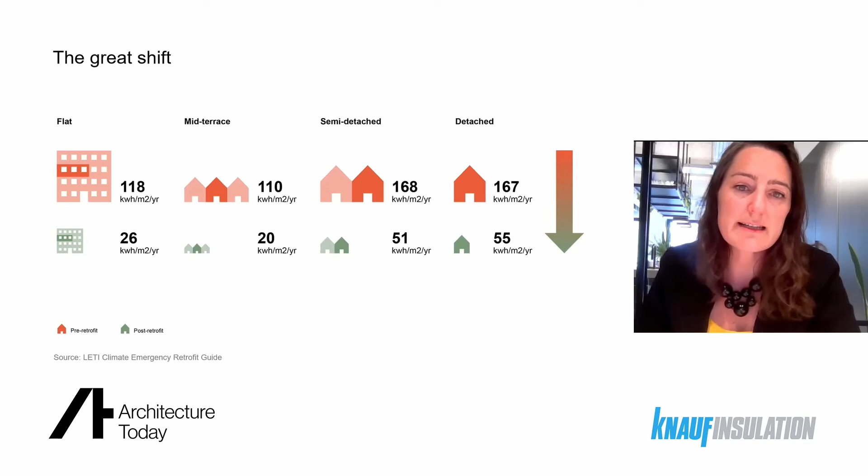It's not going to be the same targets depending on which type of property you have. So if you have a flat or mid-terrace, you obviously share some of your building envelope with your neighbors, so it's much easier to achieve a reduction in space heat demand than, for example, if you have a single-story bungalow.

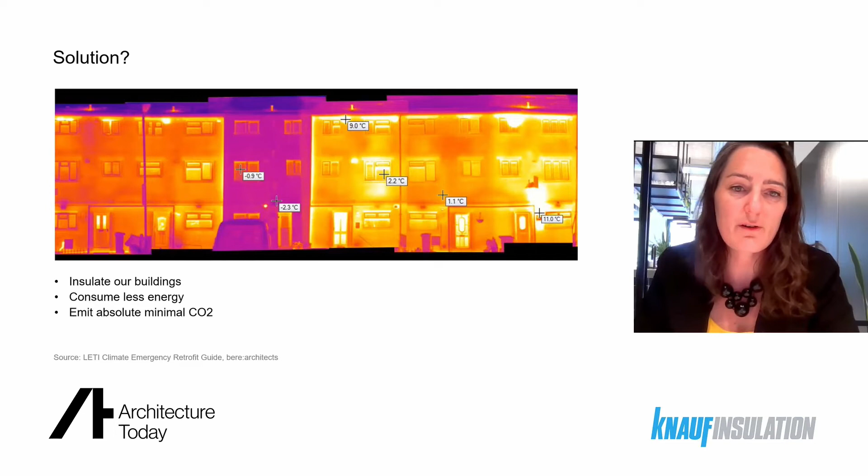So the LETI guidance is also very good at helping people embark on this retrofitting process by first defining the project and the outcome. It will not be the same depending on where the building is and what it looks like, etc. Understanding the building and the risks. So it's important to absolutely mitigate the risk of the adverse effects of retrofitting. And these are explained again here.

We need to also plan and evaluate the improvements, just to make sure that we are absolutely confident in the strategy.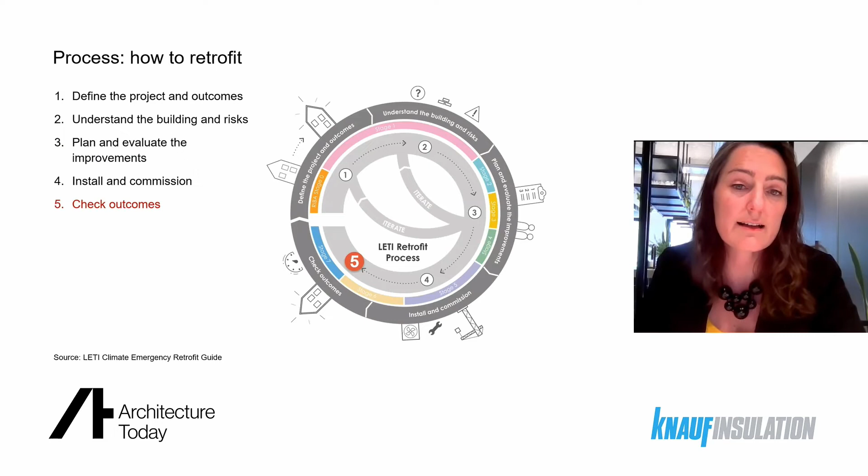And we install and commission properly all the equipment that we have retrofitted in the building, in particular, for example, the air source heat pumps, and check outcomes by, if you can, measuring the performance of the building and also the comfort level inside the properties, to make sure that you have achieved what you had set out at step one to be doing.

LETI is also very good at helping put key targets for specific elements of the retrofitting process. First of all is to be fossil fuel free, so no longer be reliant on any fossil fuel energy to operate the property. Energy use intensity is another word that you will use a lot in retrofit, and LETI is setting the energy use intensity at 50 kilowatt hours per meter square per year.

It's also relaxing it, adding a further 10 kilowatt hours per meter square per year if you have, for example, a heritage building or very poor form factor. As mentioned, for example, a single-story bungalow, you will have great difficulties in achieving 50 kilowatt hours. So you can have a relaxation of 10. And again, setting other targets for space heat demand, hot water demand, and renewable energy.

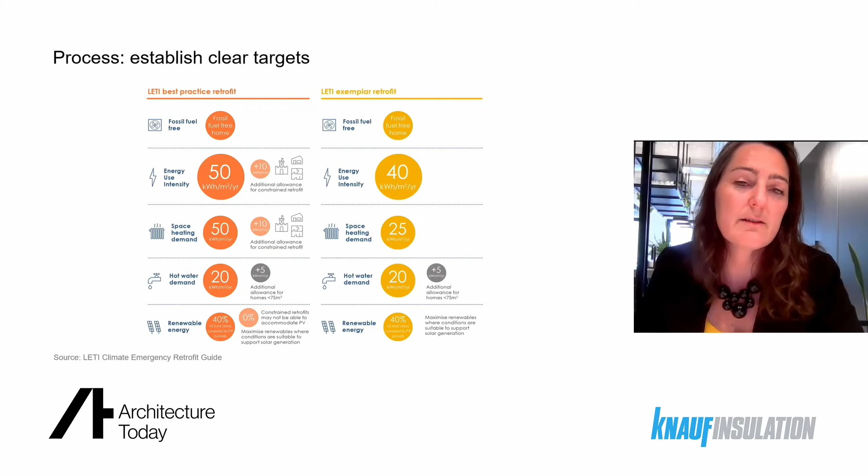The column on the right-hand side is illustrating further, more drastic targets that are effectively aligned with the Passive House EnerPHit standard. So a few case studies to illustrate how to retrofit. So there are 5 key steps. First, to address the building fabric and effectively the efficiency of your building to achieve this golden number of 50 kilowatt hours per meter square per year.

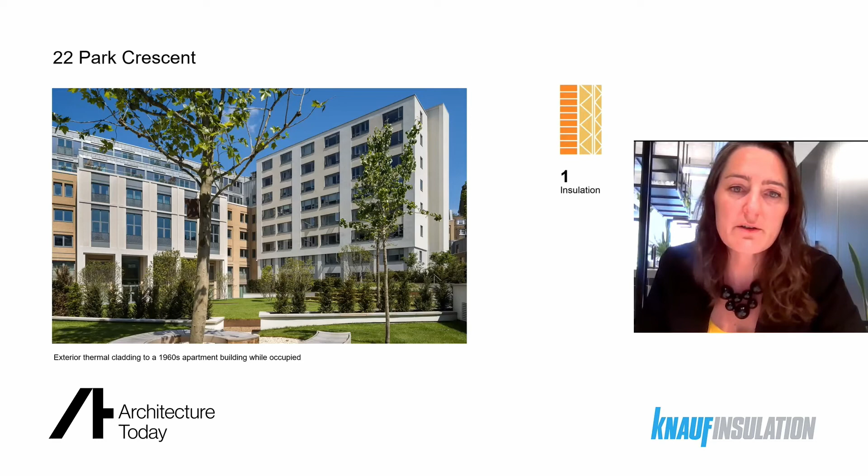In effect, if you are able to retrofit a building by adding elements and new materials to the outside, it's much simpler. You can occupy the property, and you can also vastly enhance the aesthetic of the building if it's, for example, been left unloved since the 1960s. So here, all the areas in yellow are the retrofitted layers of insulation, and you can see the new windows also adding to the efficiency of this property. On the left-hand side is a situation against a concrete wall, and on the right-hand side, a brick wall.

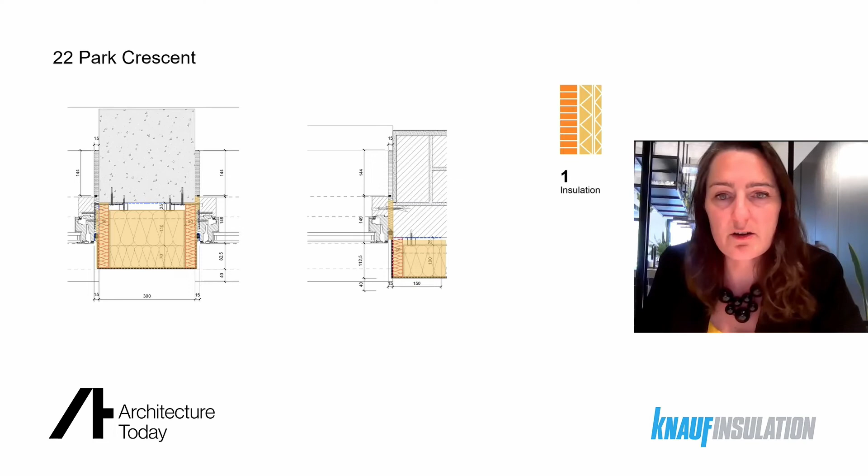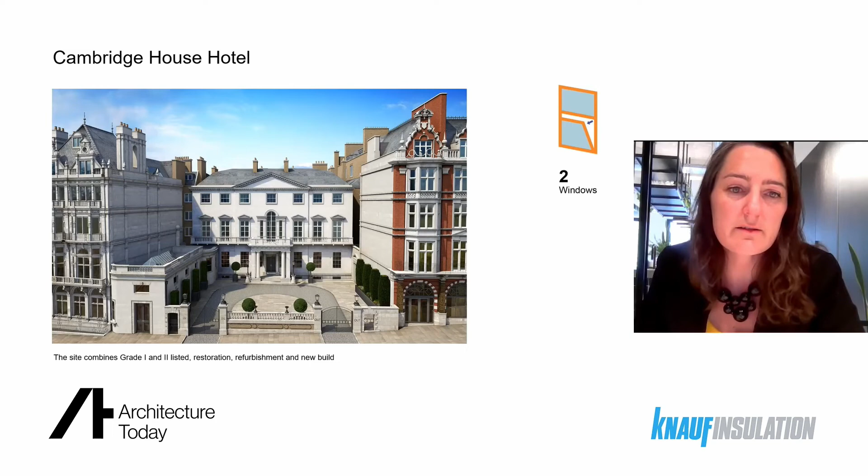Secondly, addressing the efficiencies of windows will be very important. This is a bit of an extreme case. It's actually a grade 1 listed building in front of you, which is Cambridge House Hotel on Piccadilly, and on the right and the left they're grade 2 listed buildings. But what I'm trying to articulate here is that there is not one size fits all, and you will always have to address the heritage significance of the property you're looking at if you're in a conservation area or you have a listed building, but also if you have, for example, some features in the glazing that you would like to keep. So you need to really assess each of the windows independently.

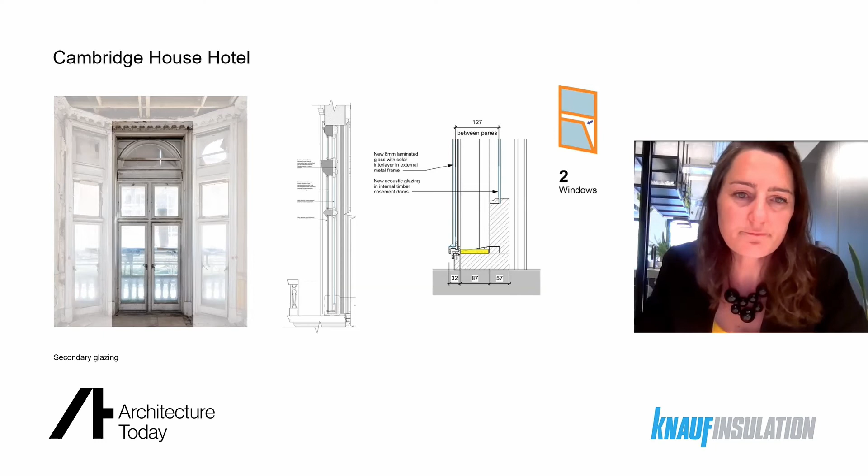This is the situation of what to do with these left-hand side single glazed casement windows. We've decided in this particular instance to install secondary glazing. You can also find some fantastic products. Of course, where there are commercial opportunities, the market will react. And here you have a LandVac on the left-hand side, which has an outstanding performance for a vacuum glass at a Ug value of 0.5 watts per meter square K.

And on the right-hand side, you have another vacuum glass from Fineo, which has a value of 0.7 watts per meter square K. Fineo also has a heritage range, which gives this sort of wobbly effect in the glass that replicates heritage glazing. So it's very interesting. You can install it either as primary glazing, as a replacement of the existing window, or as secondary glazing. It's fantastic to see these kinds of products coming to the market. They are an absolute game changer for the retrofit market.

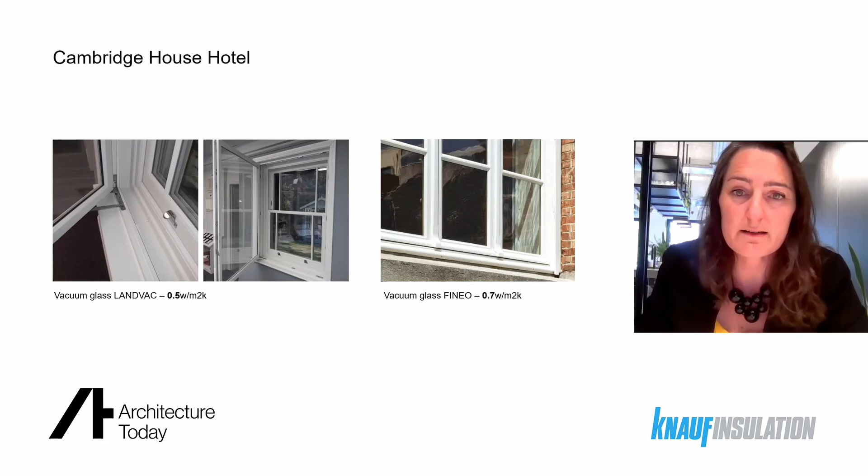I don't have too much time to talk about moisture in buildings, but obviously when you're retrofitting anything in an existing building, you're modifying the moisture behavior in the building fabric. This is really important and something that you should look into in quite a lot of detail, so that your building can carry on breathing, and the moisture can evaporate and dissipate in the building fabric in one way or another.

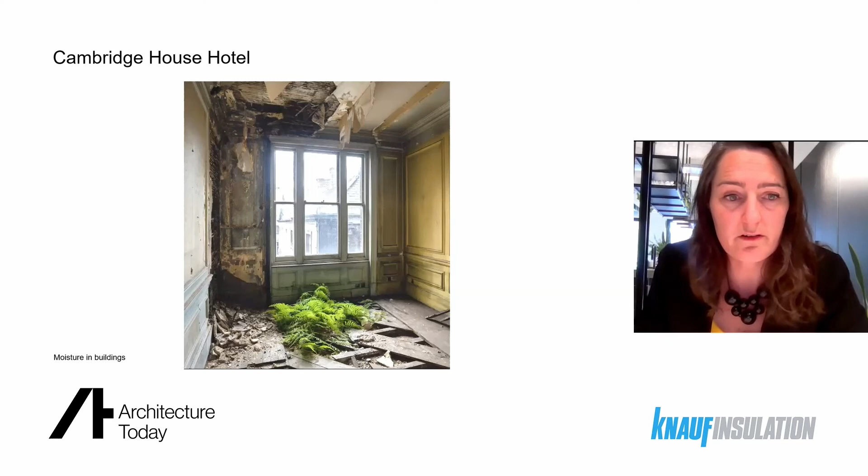Claridge House. So I've chosen this project to talk about the topic of ventilation. So to keep all the warmth that you have produced inside your buildings, you can use a system which is a heat recovery, mechanical ventilation with heat recovery, and this will be roughly 80% efficient at keeping the heat inside the building. So instead of using, for example, an extract and chucking all the air outside with all the energy that you have put a lot of effort in producing, this system enables you to keep the energy inside the building and therefore minimize the demand for a heating system.

You see on the right hand side is a utility cupboard which also has the kit for an air source heat pump. So locating these utility cupboards in a retrofit is particularly challenging, but this is absolutely the challenge that we are facing.

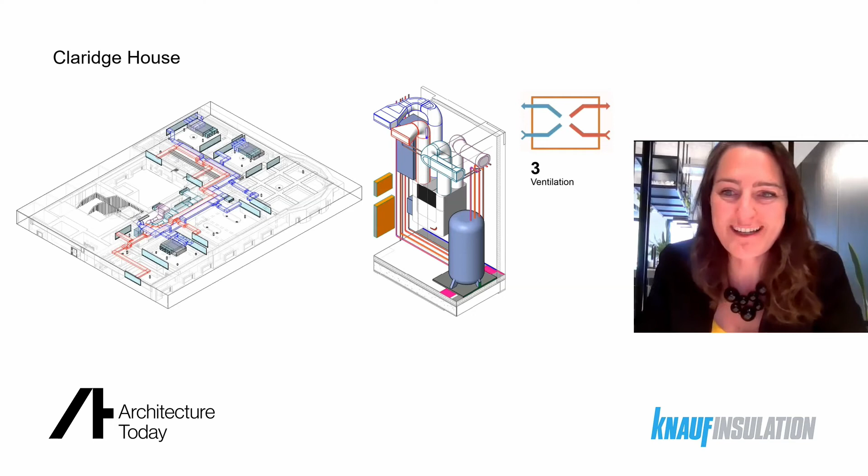Princedale Road is a project that achieved the Passive House certification, largely through the simplicity of the approach, which retrofitted a layer of internal wall insulation, and the airtightness line followed that layer of insulation as it should, but is also continuous and uninterrupted. So it's been a really fantastic project to illustrate how far we can go into making sure that these airtightness and insulation lines are absolutely continuous, one material throughout the whole building fabric.

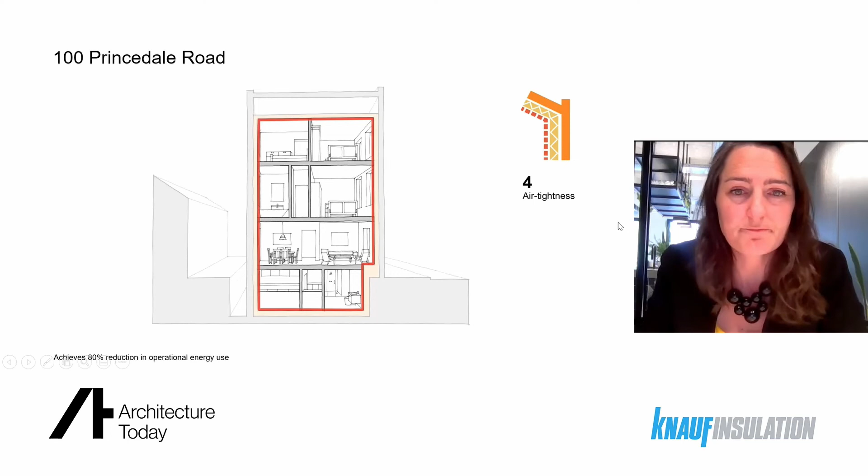Then this is Regent's Crescent, a building obviously in London as well, which illustrates here the case of thermal bridging. So we are internally insulating this building, leaving a cavity between the existing masonry and the new retrofitted element that are insulating. But we need to use some software to assess whether the retrofitting measures can affect the internal fabric, and in particular assess the risk of surface condensation internally.

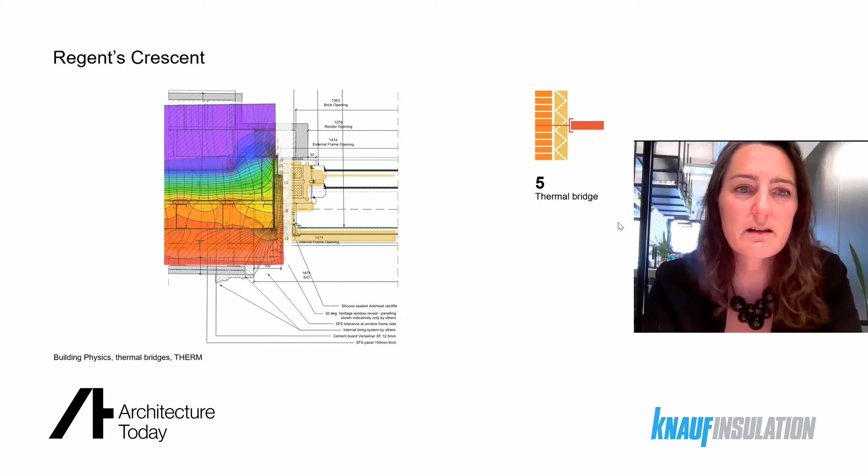So we need to have a really lovely red line or red warm colors to the inner side of the property to make sure that we don't have this condensation issue. So using a software like Therm or OpsiTherm will become a lot more common as we are retrofitting our buildings.

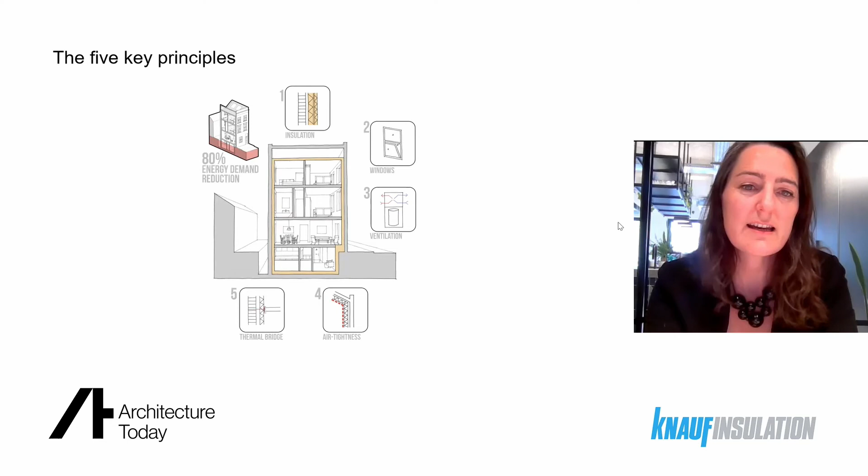So just to recap on the 5 key principles through this little illustration of Princedale Road here. First of all, we have a continuous layer of insulation. In this case, it's internal, but it can be external. Then addressing the windows, addressing the ventilation, then having a continuous airtightness and mitigating the thermal bridging. And this is your recipe to achieve 80% CO2 emission reduction in residential properties.

Finally, it's all about people, and it's all about working together. So at PDP London, we have decided to train our staff in groups so that we can help each other. And by doing this, we also know what the other person knows, and we're more able to work collaboratively if we train all together. So I would encourage you to train with the people you're working with for best results.